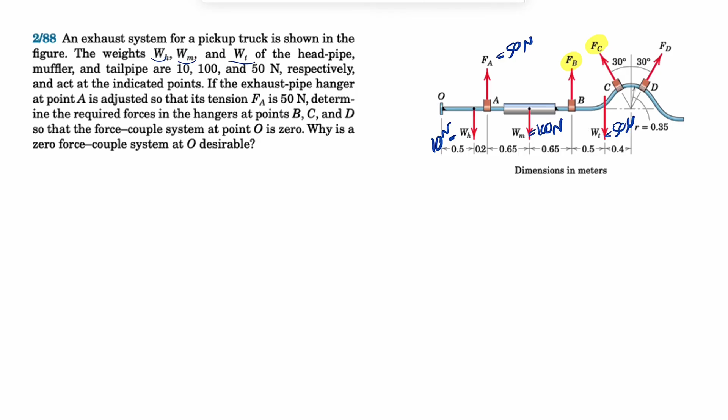If the exhaust pipe hanger at point A is adjusted so that its tension is 50 newtons, we know FA is 50 newtons, and we need to determine the required forces in the hangers at point B, C, and D. So we have three unknowns, highlighted in yellow, so that the force couple system at O is 0.

For finding the force couple system, we need one single force that represents all the forces in this system, which we'll call the resultant, R. The sum of all forces has to be 0 because the question asks for a zero force couple system, and the moment about O also has to be 0. So we get two equations from the first condition - sum of forces in x and y equals 0 - and one moment equation. We should be able to find the three unknowns.

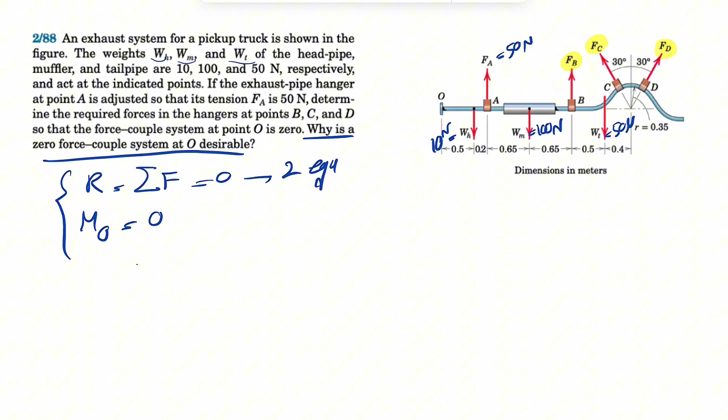Also, at the end of the question, why is the zero force couple system at O desirable? The reason is that if there is a net force at point O, it would transmit vibration into the frame, causing noise inside the vehicle. It can create fatigue stresses in the bracket and eventually lead to cracking or failure. So it makes sense to not have any moment or force at point O in order to have the pipe balanced.

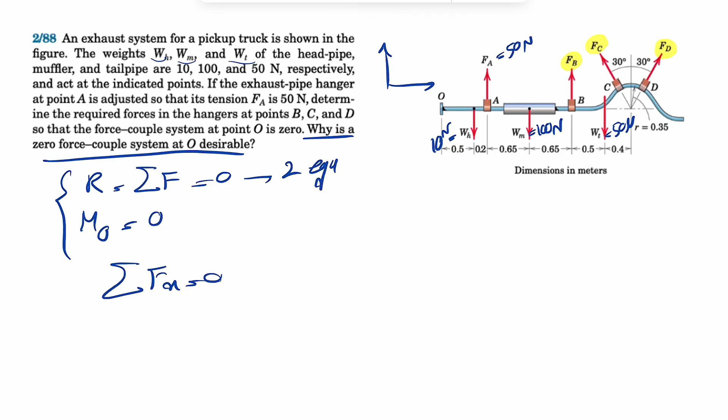Now let's find FB, FC, and FD, starting with sum of all forces in x equals 0. Let's show our x and y axes. Looking at Fx, we have two forces in the x direction, FD and FC, both making the same angle with the vertical, 30 degrees, and these are the only forces in the x direction. So FD sine of 30 degrees, which is positive, minus FC sine of 30 degrees equals 0, which means FC is equal to FD.

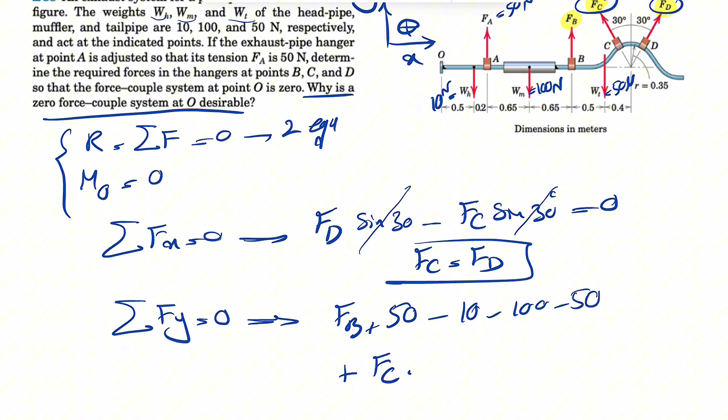That's our first equation. Let's move on to sum of all forces in y equals 0. We have FB upward, 50 newtons which is FA, and all the weights negative 10, negative 100, negative 50. On top of this we have the y component of FD and FC. Since they're the same force, I'll call it FCD - both upward, so FC cosine of 30, times 2 since there are two, equals 0.

Now we have one equation based on FB and FC, which means we need our last equation. Let's move on to the moment about point O, and we'll come back to this equation later.

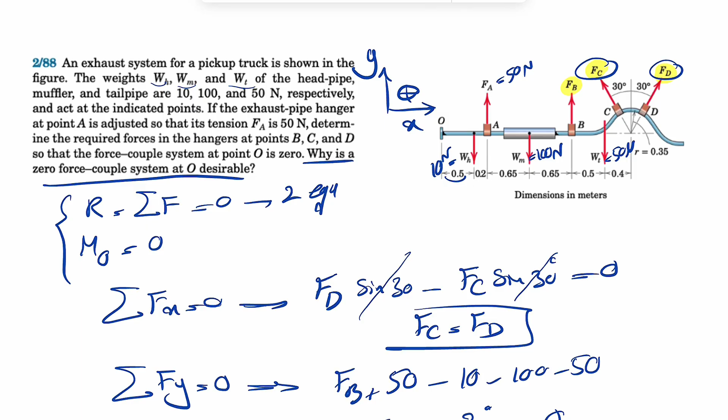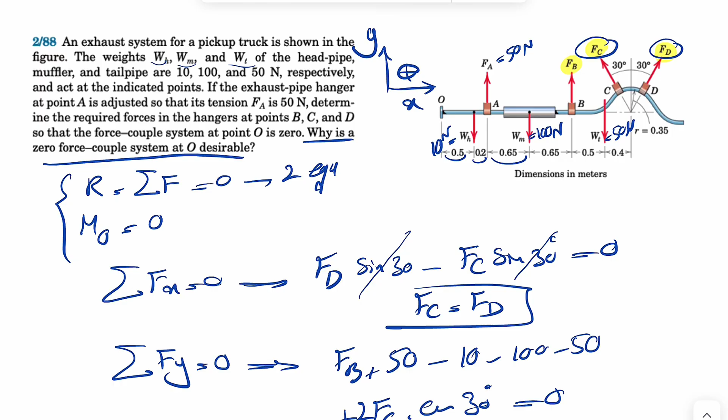Sum of all moments about O has to be 0 in order to get that zero couple at point O. The moment of WH is clockwise, so negative 10 times 0.5. We have the moment of FA, counterclockwise, positive, so 50 times the distance 0.5 plus 0.2, which is 0.7. We have the moment of WM, again clockwise, negative 100 times the distance, which is 0.65 plus 0.7, so 1.35.

We have the moment of FB, which we can see is counterclockwise, so positive. FB times the distance would be 0.65 plus 0.65, so 1.3 plus 0.7, that's going to be 2. FB is out, and we can see FC and FD.

We can resolve them into two components, but before that, let's just do the WT too. So WT is also clockwise, so negative 50 times the distance. Let's see what we get.

So we had 2 for this part plus 0.5, so 2.5. And if we go with the x and y component of each, we can see that the x component of these two forces, FC and FD, won't make any moment, because it passes through the point O. So no moment from the x components, but the y components, which are f sine and f cosine of 30 degrees, they're going to make moment.

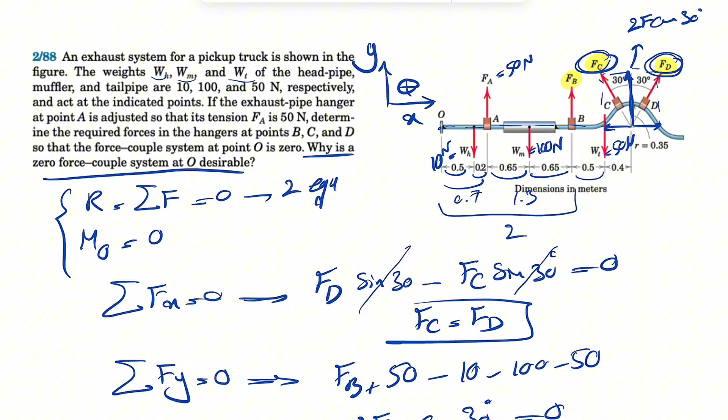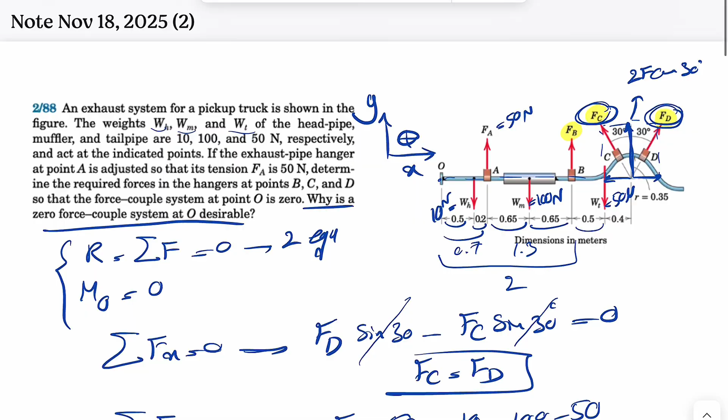And I'm just going to call these 2f cosine of 30 degrees, which is the resultant of the y component of FD and FC. So 2f cosine of 30 plus, and the moment we can see that it's going to be counterclockwise, so positive plus 2, we call it FC cosine of 30 degrees, and that's the force, and the distance would be, again, we had 2 plus, this is going to be 0.9, so it's going to be 2.9.

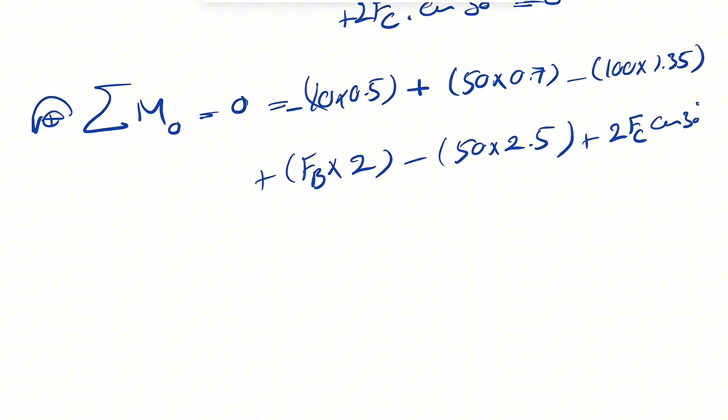Let's just show it in here. 2fc times cosine of 30 degrees times 2.9.

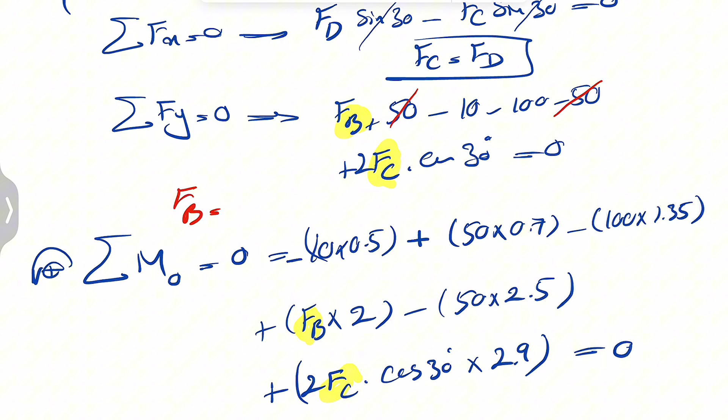All right, so we have another equation based on FB and FC, and in the previous one we had another equation based on FB and FC. So what we're going to do is in the previous one, we're just going to find FB based on FC, plug it into the second one, and we should be able to find the answer. So FB in here would be, we can cancel these, and if we just bring it to the other side, it would be 110 minus 2 FC cosine of 30 degrees.

So let's just double check everything. 110. Yeah, so everything's correct. Let me just clean up this one a little bit. Negative 5 is going to be 35, negative 135, and this is going to be negative 125.

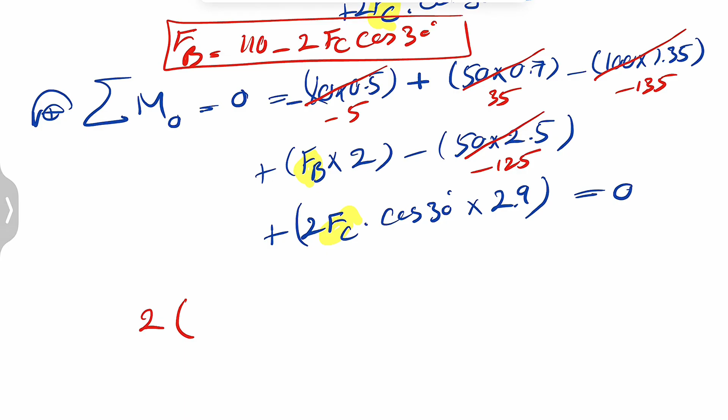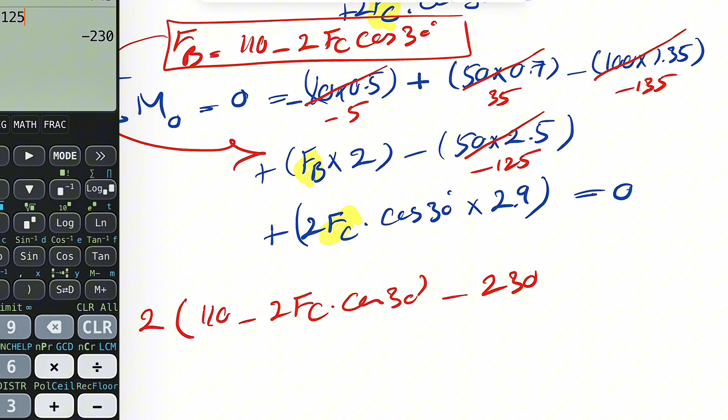All right, so we have 2FB. I'm just plugging this one into the second equation. So 2FB would be 2 times 110 minus 2 FC cosine of 30 degrees. And we have negative 5 plus 35, negative 135, negative 125. So that's going to be negative 230 plus 2FC cosine of 30 times 2.9, and this will be equal to 0.

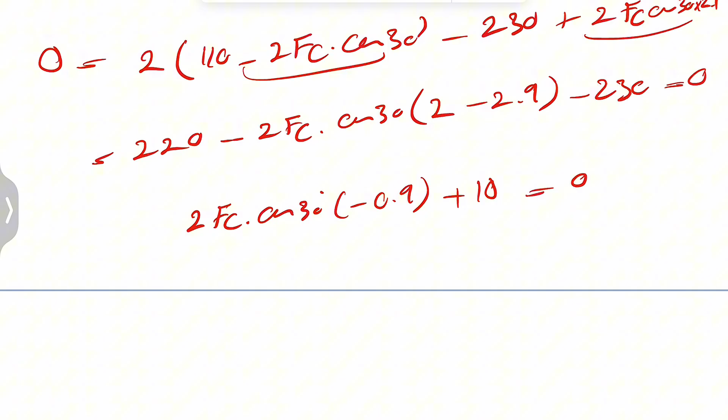So that's going to be 220, and from these two we can factor out negative 2FC cosine of 30 degrees. So the first one is going to give us 2, and the second one is going to give us plus negative 2.9, and negative 230 equals 0. So 2FC cosine of 30 degrees times negative 1, or negative 0.9 minus 10, plus 10 is equal to 0. So this is going to give us FC, which is 10 over 0.9 cosine of 30 times 2.

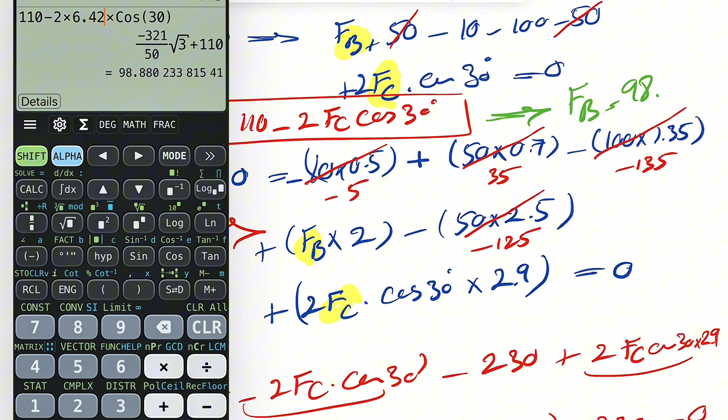And yeah, that's going to give us FC equals 6.42 newtons, and we've figured out that FC is equal to FD. So now that we have these two, we should be able to find FB from here. So FB is basically 110 minus 2 times FD, which was 6.42, times cosine of 30 degrees. And yeah, that's going to give our FB as 98.9 newtons, the final answer for this question.

So it's just a matter of calculation after writing the equations, but other than that, it's pretty straightforward.

And why is the resultant force and moment system zero at O? The reason is that by making the resultant force and moment at O equal to zero, the hangers carry all the loads, so the pipe remains balanced, and this keeps the connection at O unstressed and prevents vibration and noise from being transmitted to the truck body.